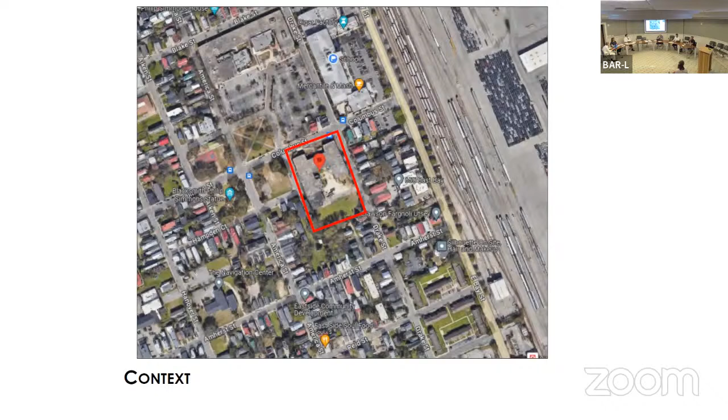63 Columbus Street is on the east side. It's not rated. It dates from 1957 in the Old City District. Applicant is requesting a review of a mock-up panel for a support building for the early college high school. Just by way of orientation, this is where said property is located.

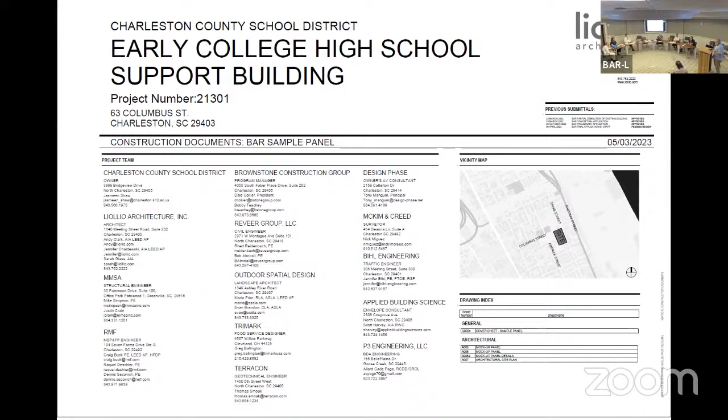Now we're ready for the applicant's presentation. Thank you, I'll be very brief. My name is Jay White, for the record, with Liollio Architecture. I'm here tonight with one of our associates, Sarah Glass, and Dion Jackson, who is with Contract Construction Company, who built the mock-up. We've worked very diligently as a team to get this mock-up to where it is. We're very happy with it, we hope you all are too. We're here to answer any questions you may have.

Are there any questions from city staff or the board at this time? I have one question, Mr. White. I went by and there's a small hole on one of the canopies, did y'all notice that? Yes, is that a drain hole? Okay, it drains the backside of the gym.

Other questions from the board or staff? To dispense with this, is there any member of the public wishing to speak on this item? Seeing none, city staff comments and recommendations.

Staff appreciate the quality of the mock-up panel. Staff note that while it is generally preferred to have window sealant and lintel color and brick walls match the generalized brick mortar blended color instead of the window color, the sealant in this case is very well executed and is acceptable. While a projected sunscreen assembly is shown on the mock-up, which incorporates a lintel, it is appropriate that this all be the same color. It is generally staff's position that where no sunscreen assembly exists, the lintel should match the generalized material color above it. There are no staff conditions for approval, and staff recommendation is for approval of the mock-up.

Would anyone on Mr. White's team care to respond to that, since Jay excused himself? Okay, very good. All right, so we move to discussion and vote, or maybe we don't need discussion.

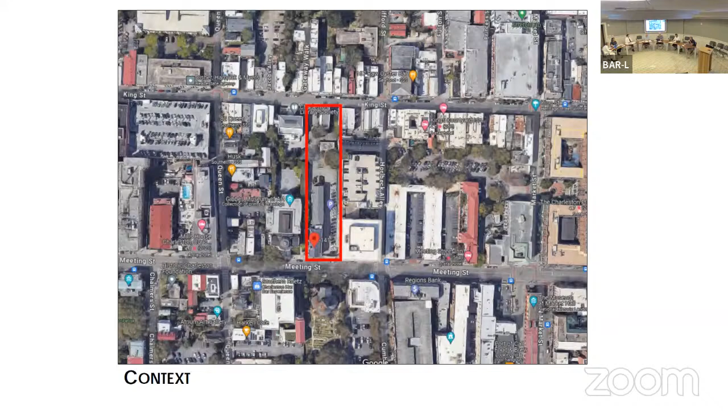We are ready for the applicant's presentation. Hello, my name is Ted Rish. I'm an architect with BMOC Hospitality Collection. And the slide is loading, but I think once it loads, you will see that we have some columns that are replication columns put in around 1960, we believe.

We don't know the exact date. They do not date back to the original E.B. White building that was built in 1876. We have reason to believe they were put in 1960 when SCE&G added the parking lot renovation to the site, and we feel they're not contributing to the public realm in any way.

We'd like to remove those. We did get demolition approval last fall for the 141 addition. We probably should have included these, but we didn't know at the time. We would need to get final approval on these particular columns so we can make way for the demolition equipment to get into the site for the addition and the Gibbes renovation they're doing right now back in the property. So we are seeking final approval for these elements of the site.

Since it's not loading for whatever reason, although it was on, what's on there is the color of the columns being kept versus the ones being removed. Could you just point on the screen? Sure, behind you.

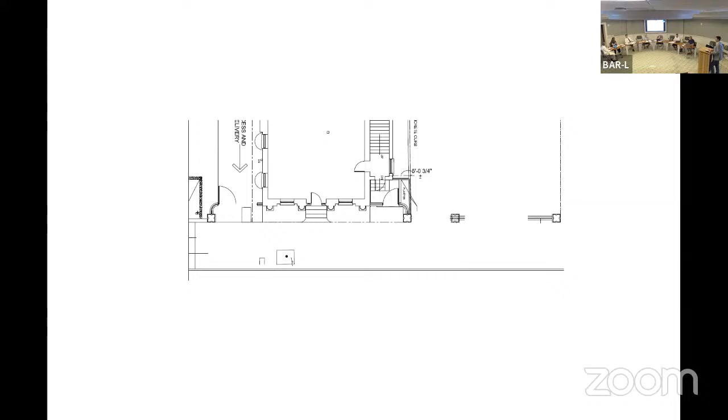City staff comments and recommendations? But do we need public comments? Oh, excuse me, yes. Is there any member of the public who wishes to speak on this agenda item? Seeing none—

It's very brief. Anna Catherine Alexander with the Preservation Society of Charleston. We appreciate the applicant reaching out. We're comfortable with the scope of demolition proposed to facilitate an improved pedestrian experience. And we just wanted to say for the record, we appreciate the applicant's willingness to reuse the existing ironwork on site and just encourage the board to incorporate that into your motion this evening. Thank you, Ms. Alexander. Any other member of the public wishing to be heard?

Seeing none. City staff comments and recommendations. For context and analysis, the two columns and low wall requested for removal date from the late 1950s and are not original to the EB White building as stated by applicant. The iron gates in front of the structure initially stood at the former building site on Church Street and were included by EB White when he designed the structure in the late 1870s.

Staff conditions for approval: all deconstruction work is to take into account adjacent or nearby structures and the protection and monitoring thereof. If any foundation work involving significant vibrations, such as driven piles, may be reasonably suspected to be a threat to historic or new adjacent or nearby structures, a program must be put in place addressing how these structures are to be protected and monitored. A copy of this protection and monitoring plan is to be transmitted to staff for review prior to work. This is because it's a category 1 building.

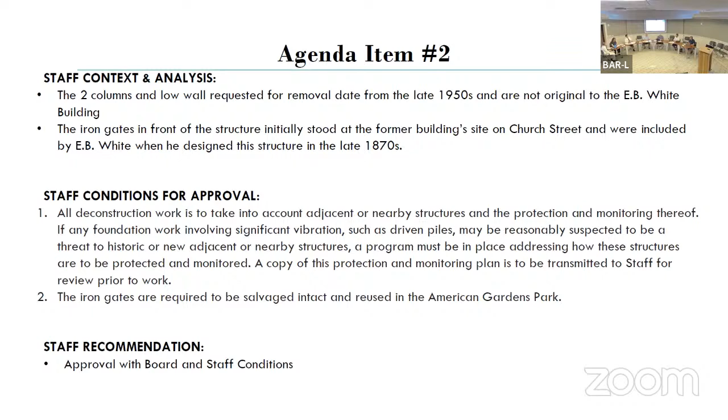Thank you to the applicant, which brings us right back to agenda item number 3. Item number 3 is also at the same property, 141 Meeting, or the larger site. The buildings include a Category 1 and Category 3 building. They are requesting conceptual approval of a new park plan, modifications to the existing 174 King Street building, which is the Category 3 building, and addition and modifications to the existing 141 Meeting Street building and Building Link, which is the Category 1 building.

No aerial necessary because we already just showed where the location of the property is. Very good. Mr. Rish, you have the floor again.

Again, for the record, my name is Ted Rish. I'm an architect with BMOC Hospitality Collection. I wanted to first ask if we could have an additional 10 minutes for our presentation. We'll be brief, but we may need that additional time. I wanted to let the board know that on behalf of our company, we're committed to working through all the details with all the stakeholders that may arise moving forward with the project.

I wanted to let you know that we broke down the submittal into three different components. You'll see the garden plan first, presented by Reese Roberts. Then you'll see the 174 King building presented by LS3P. And then the 141 building will be presented by Evans and Schmidt. So with that, I'll turn it over to David Kelly with Reese Roberts.

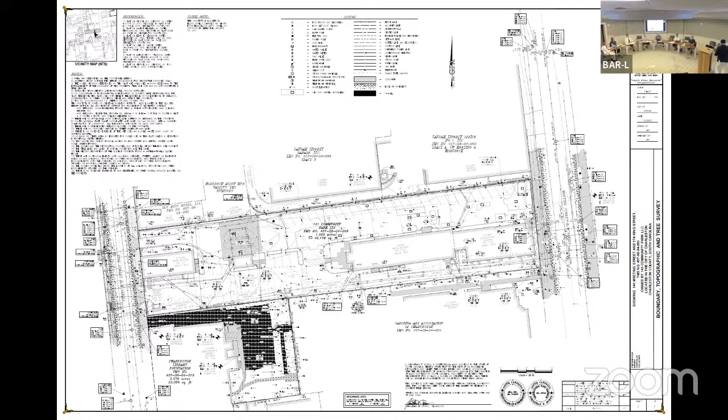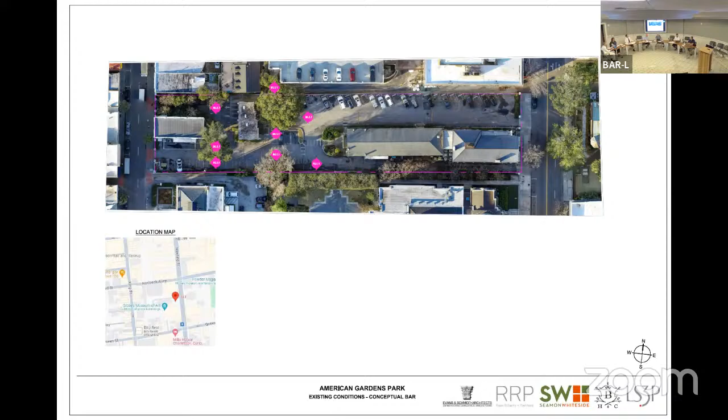If I could have the next slide. This basically shows you the building on King Street and the building on Meeting Street. This obviously gets demolished, and this is that bank building here. So the park essentially exists all between that, and in a sense the park holds those two buildings together—it's the landscape in between the two buildings. If I could have the next slide.

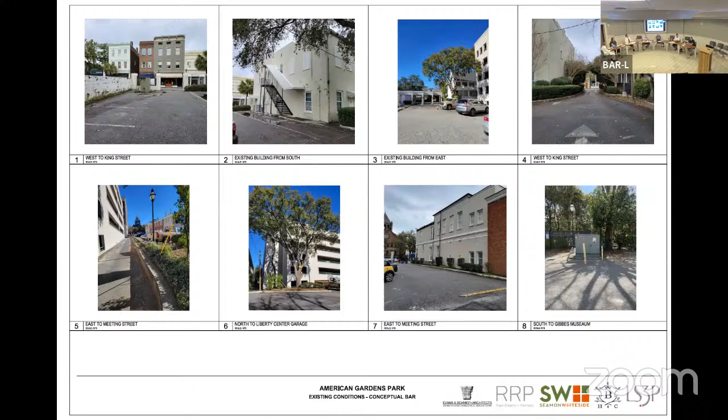These are more about the building, which we could keep going. Yeah, that's the building over here. And this shows the two buildings to be demolished.

These are images of different parks that we started to look at. This is Bryant Park in New York—we can click through these slides in a timely manner so we don't keep you forever. The idea of this beautiful lawn in the center of the city: we really wanted to think about this green space that was cool and lush, a place you wanted to go to when it was hot.

This is the Tuileries in France, looking at different ways you could connect the garden. We looked at the cemetery walk—that was a big one for us. When it gets to the library, it starts to break apart a little bit, so we thought of this garden as a way it could bring you across and connect up. I was particularly fascinated by the different ways you can slip through the city in the opposite direction to Meeting and King. We wanted to look at the park as a way to go between it, so if you had a meeting, you could use this that way.

Or you could slip into the park and meet your friend, have lunch, or get a sandwich and sit in the park. The introduction of water, which is in the plan, is very tranquil and beautiful in the city. It helps bring down the noise of traffic, a beautiful contemplative place. So we're really thinking about beautiful experiences for people in the city, and that's what makes great urban parks at any scale. It doesn't have to be Bryant Park or Central Park, they all work.

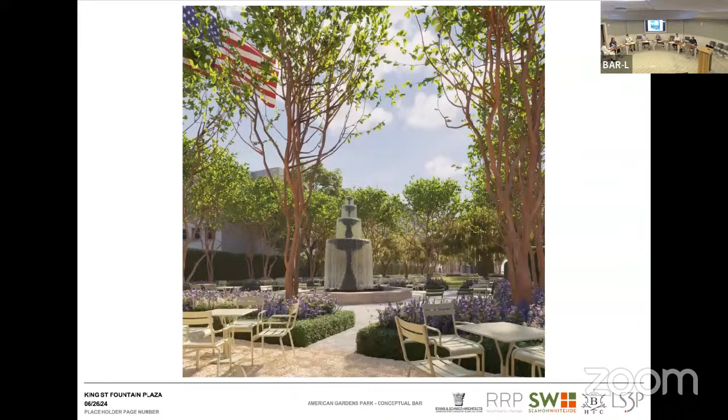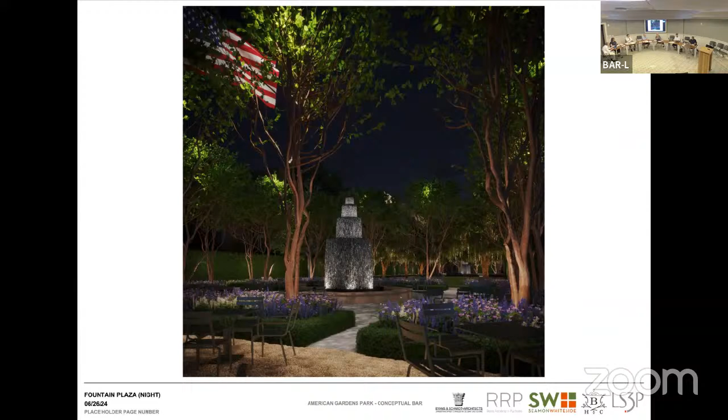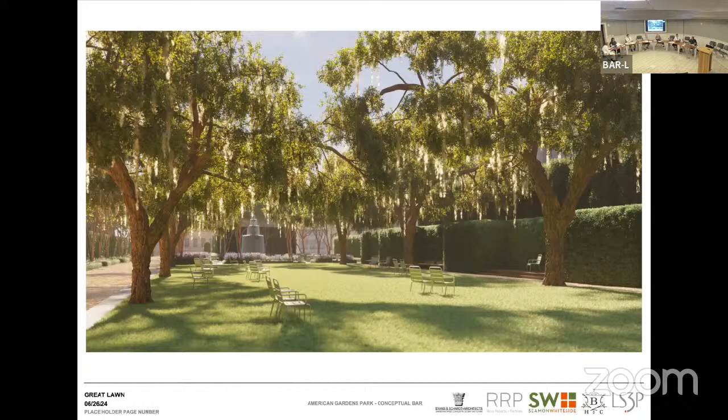These renderings basically take you through the various components. This shows the fountain plaza. The idea is also to bring the scale down, particularly of the two parking structures opposite the Gibbes, so that when you're in the park, the parking structures are more minimized, looking at the Great Lawn. The wonderful thing is these renderings actually depict the plantings at the scale they'll go in - this isn't something we'll be waiting 20 years for.

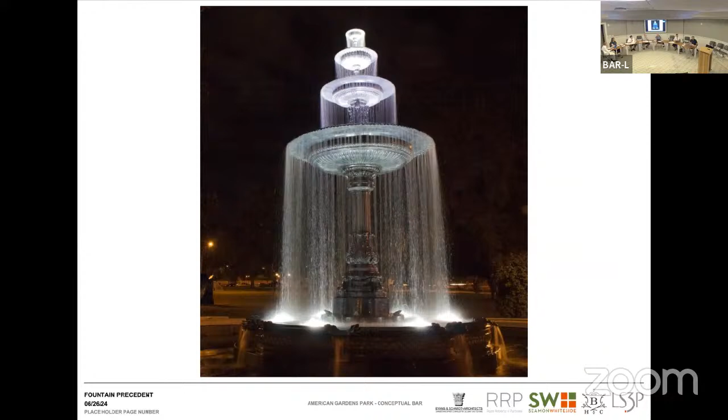So the fountain, looking back at the Gibbes building, the Fountain Plaza - looking at precedents for fountains, the idea of having something elegant but classical. We thought a lot about lighting at nighttime so the park feels very inviting at night, keeping it residential in feeling, but obviously you want to make it safe so if someone's there at night, they don't feel unsafe.

Bringing us to the gates, we started looking at gate designs. Myself and several team members went around Charleston, particularly in the area, looking at gate designs in that vicinity, up the road, around the corner - what was the context, what did the gates look like in that area, what they might look historically, the idea of columns, gate designs, things like that. The idea of columns with beautiful limestone caps, perhaps a beautiful crest for the American Gardens.

There are two inlaid pieces at the bottom, which would be painted brick, and then beautiful ironwork with a filigreed crisscross pattern at the bottom, which also mirrors itself in the gates that open. This is the King Street side, and the gates are all the same at the entry points, with one entry point on Meeting Street, one on King Street, and one on the opposite side of King Street. So they all play with each other.

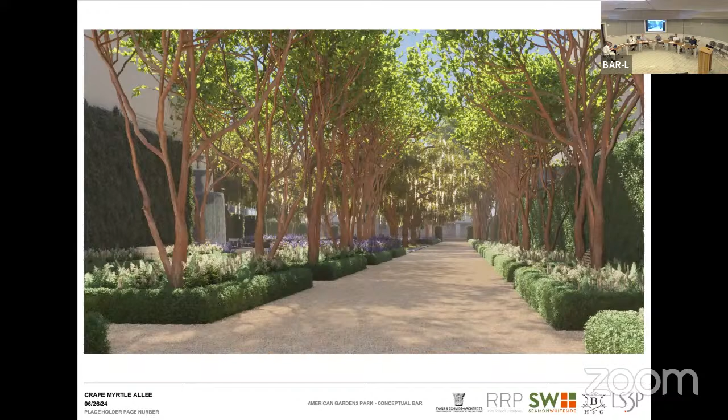So in that view, that would be a cobble? Please take the renderings with a grain of salt, because they've happened over a period of time and we've been updating things and working with materials. So essentially what we now have is this cobble in most locations because of ADA requirements.

We've been working on drainage and ADA compliance. The gravel didn't work with the drainage but it worked with the ADA, so we've been working to find something that works with both ADA and permeability. Whitner from Seamon Whiteside can speak to this more, she's been working like mad on this. Essentially it's beautiful tumbled pavers with gravel inlays on the alley.

Thank you. Members? That's the hedge, right, that you can see? Yeah, I see it. It runs basically around the entire park.

Good, very good. Other questions or commentary from the board at this time on this phase? Sounds like you've decided on crepe myrtles for the landscape architecture. Yes. You might love their crepe myrtles, don't they? I think that's at the entrance of Charleston Place as well.

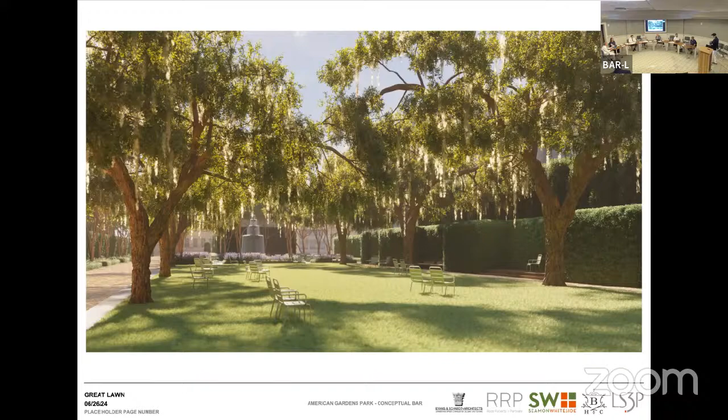My name is David Burt, I'm with LS3P, 205.5 King Street. We're now going to talk about 174 King.

As BD alluded to, this is a category 3 building. It's lived many lives. As best we can tell, this building was constructed around 1850, and ironically its original use was called Mount Vernon, used as a little cafe, a little ice cream shop, which is ironic because we're trying to put it back into use as a similar function. Back then it was named after Mount Vernon as a credit to George Washington, and we're going to be celebrating this as a park on the 250th anniversary of our country from 1776, so it all seems to be making full circle.

It's lived numerous lives. We know there was a fire around 1863, and this building did get burned, but we don't think it was burned completely down. We think just the inside was burned, a lot of the bones, and it was reconstructed just as it was. In its last life, we know it was an undergarments facility, they were building them upstairs. I'm not going to say what kind of sweatshop type thing they were doing, but whatever, that's what it was.

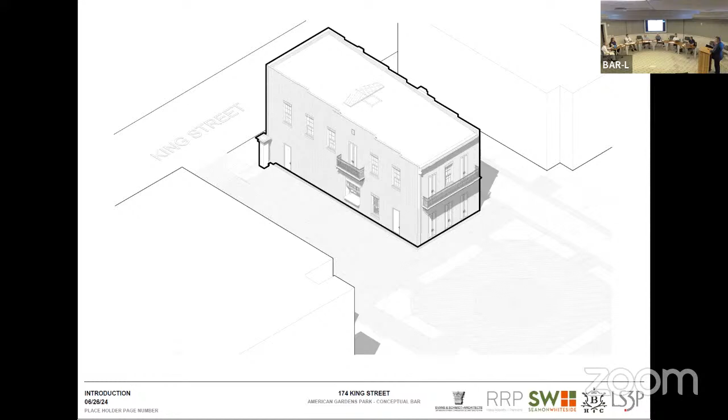So now, today's use, it's going to supplement the park. It's intended—you can go to the next one or I'll go. So there it is up on King Street.

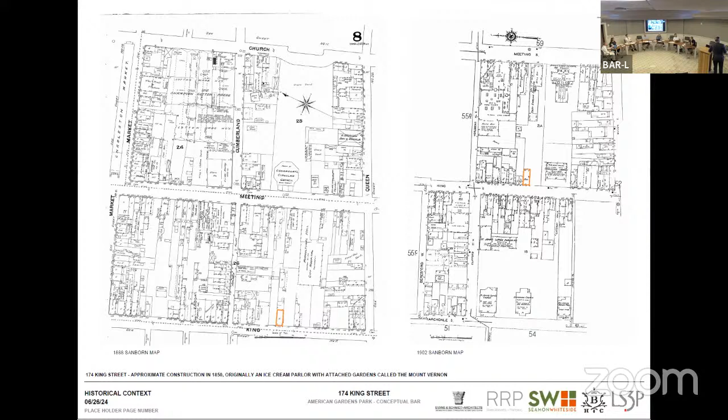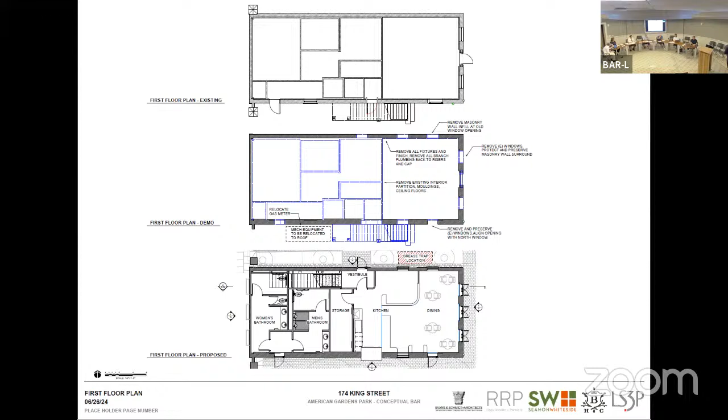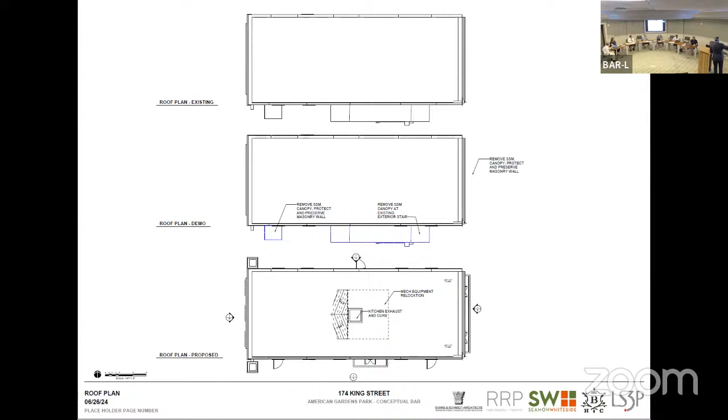Second floor, again existing, demo, proposed. You come up to the second floor, we have the park offices up here, and this conference center, bridal suite, whatever it's being used for, again has those views out to the park. We did incorporate a couple of balconies strategically, one covering those French doors below, and here this is actually protecting the transaction window for the cafe itself. And then we have some public restrooms up there. The roof, we're backing the equipment up as far as we can. This is just a section through it.

Again, the proposed elevation—existing, demo, proposed. We did walk around a lot of the buildings in this area on the back side. They do have these balconies. I wish I'd put that in this presentation, but it's very common to have these French Juliet-looking balconies literally across the street on King Street. The building—if you're at the front of this building, look across the back side—has those balconies.

Again, now on this north side, I do know for preservation purposes, if we could reduce the number of openings, that is a concern. We were told that it was a concern and even brought it up with Historic Charleston, the Preservation Society. It's possible that we could lose some of these windows if we need to. So we wanted to show you the design that would achieve the best outcome for our purposes, but if there is some concern about the number of openings, we can revisit those with you.

This is the south elevation. I would say the elevation that's going to become the most active of all of the elevations. This is where the transactions would be occurring—your bathroom access, your cafe access, transaction window, and the stairs going away. And we're not doing anything to the King Street elevation, leaving it as it is.

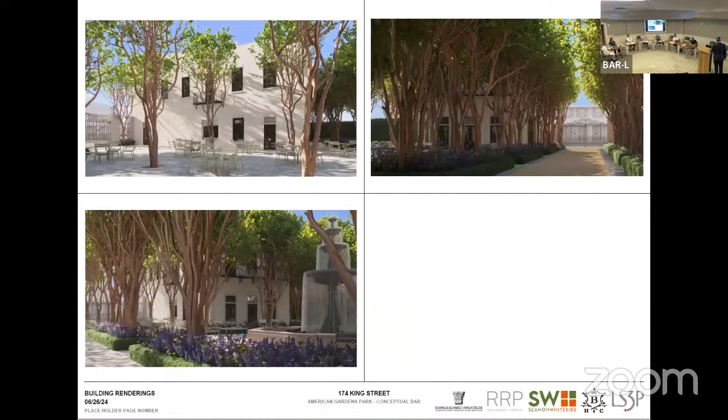These are a couple of the renderings that Reese Roberts basically just pulled out of theirs. They're not exactly depicting what we drew, but they're close enough for the purposes of today. Next round, they'll be a little more accurate. I think that's it. Yeah, that's it for me.

Very good, thank you. You all want to talk? Questions—yeah, questions from the board on this phase at this time. I do have questions. Good.

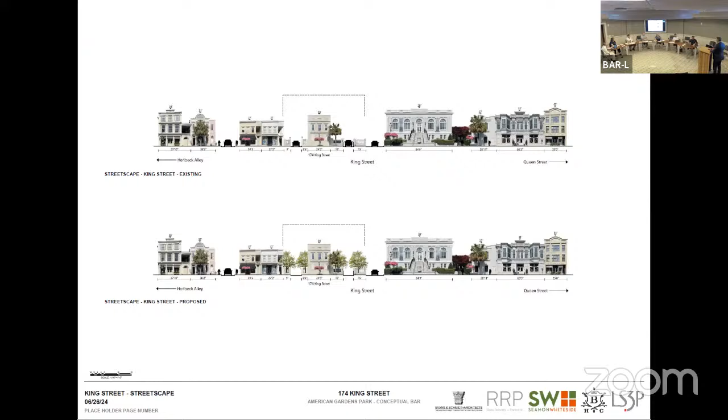Can you talk about the windows that are there now? I think they're all aluminum clad. And they don't really fit—are they staying? So the windows that are there now, I believe Dominion put them in there in 2016. They are pretty new.

I think they had board approval. There is a BAR plaque in there. Well, anyway, are they staying as is?

Those are insulated windows. Right now we're thinking we'll keep them, paint them, and match them for anything new we do. So the proposal would be some type of aluminum-clad wood for the windows.

For the doors, all the doors we're doing are going to be the equivalent of a Hope's door. We're trying to do the thin black, which if we paint the windows that are there now, it'll look similar if we use the same. So that's the intention.

On the south elevation, the one being drawn - those two doors on the ground floor would be some type of aluminum, full glass. It's intended to be full glass. We're debating whether we create a datum line and let the door be here and the glass be there, but it'll be a Hope's window or Hope's-looking window, a grand window.

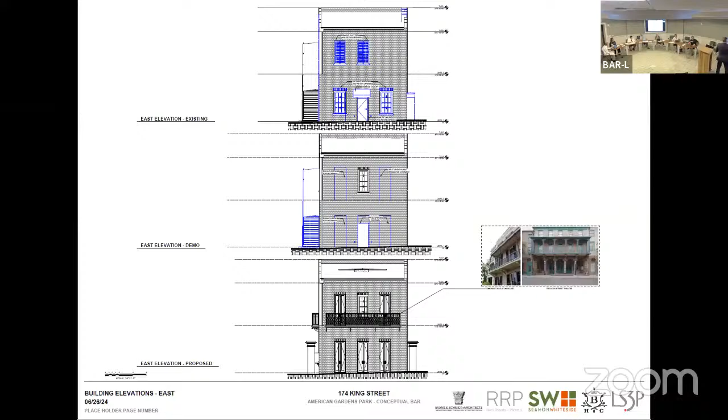And the French doors, and the window - is that some sort of slider? It is, like a slider. See it like a Wendy's or something? Yes - well, it's not quite like that.

I know it's not, but I know this is conceptual - I'm just trying to get a sense, because you can see that really clearly, and I want to make sure it feels like it would be in the building. We've got photographs of some really good transaction windows in parks like this that don't look like McDonald's - it's a Wendy's, a little nicer.

We were thinking about that too, that we don't want something that's just a roll-up, because - it's a hot day today, they were going to walk over here, I said you're crazy, we're going to drive. So we're going to have something you can open and close, but it feels good and is similar to the product we're using for the doors.

Okay, thank you, I wasn't clear on the windows and doors, so that helps a lot. Thank you, Mr. Metters?

When I looked at the building, on the west elevation, the bottom left window and the bottom right window - they're actually louvers right now.

Below the window on the left side of the north window and below the window on the right side of the south window, there are these interesting cracks that go in the stucco almost all the way down, almost as if that's been enclosed, or it used to be - I think this whole thing used to be storefront. I was looking at that and it was. Yeah, interesting. This building's lived so many lives. Digging into it has been fun, just to understand a little more about the history of it. But I do believe that ground floor - this tells me there was an awning here at some point.

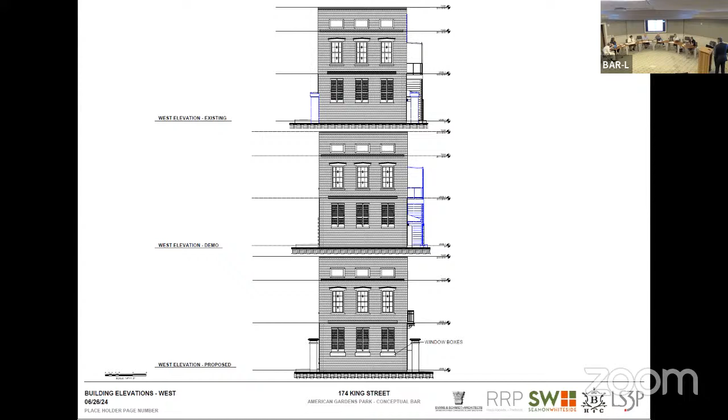Thank you. Other questions or commentary at this time on this phase? You're done.

Now that they've got you warmed up.

The Gibbes and the City of Charleston are going to have the opportunity to purchase the White Building from BMOC and incorporate it into their museum.

It sounded good, but the only problem is the only way a museum can expand is enclosed. If you have a separate building, the project will fail because people will not go from one building to another for museum exhibits. If you have a separate building, we have to have separate means of transportation for the art, which we put in place in 2015 to become an accredited museum. We actually had to have a loading door put on the south side of this building that semi trucks back up to, with sealed enclosures and everything.

We don't have the space or the ability to do that here.

From moment one, the struggle was: how do we do this? How do we connect these two properties that are both historic, that have two different architectural languages?

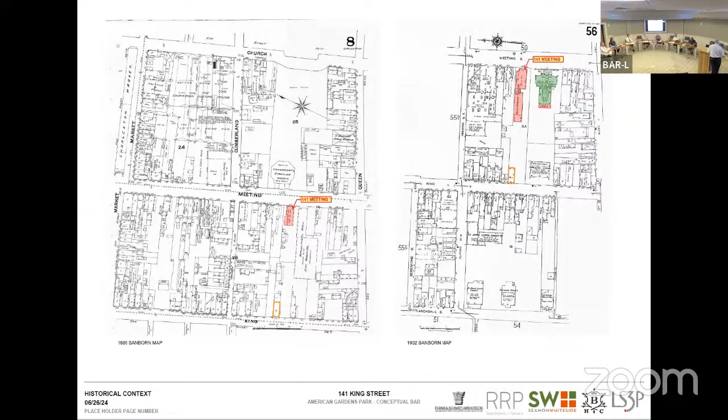Some of them incredibly bad, and some of them very nice. And the predominant success was always with—I'm destroying your clicker—was with a soft arch.

But one of the things that we did learn from this is that the distance between them could not be too great. And the distance we have between these two buildings actually is fairly large, as it's straddling both properties.

So the first premise I knew I had to do is try to reduce this, get it all on the E.B. White site and not on the Gibbes property. Get that span down so that it did not look like a bridge, it looked like a building connection.

That was Europe, and I met with Lawrence and BD, and BD said, well, that's all well and good, but find something in the United States, preferably on the East Coast, preferably between two historic buildings. And luckily, I had been to this site a few years ago in Chicago, and it hit most of the buttons that I needed to hit.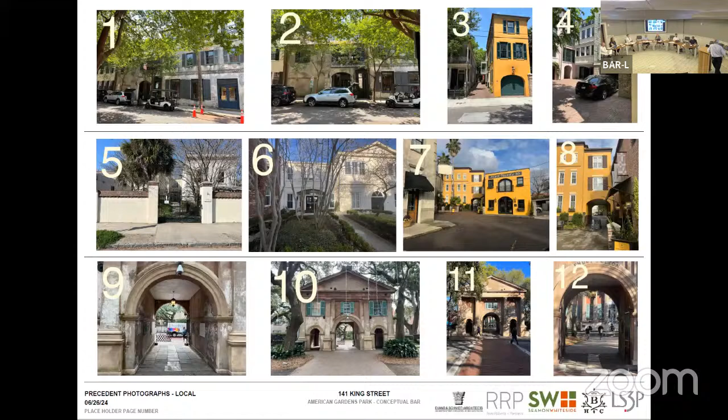Examples in Charleston—there are some bridged. These two buildings are separate, bridged right at the street. This is a project that y'all are familiar with, up in the neck a little bit more. This one I totally forgot that we had done, ironically, when we did this about 25 years ago.

This is connecting the McBee building with Lane Hall and Ashley Hall, set back from the street, and in this case, it's enclosed on the ground floor. But it's been very successful.

This was one that I didn't know had happened, and I keep meaning to look into it. I'm pretty sure that's historic. I know that one is, so I assume this is the link.

All this time, though, I always had the Porter's Lodge in mind, because I've always liked it. I just thought it was a neat thing. This is College of Charleston, the Porter's Lodge, with the two side gates and the centerpiece.

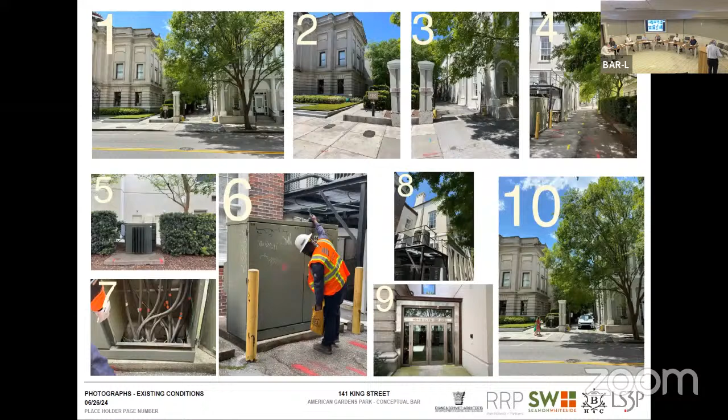So with that, we started tackling the problem. I wanted to keep the span only on this property. We had to deal with the issue of transformers, the link to the Gibbs, but beyond the Gibbs—so Gibbs ends here, then these are additions that were done in 1977, I believe.

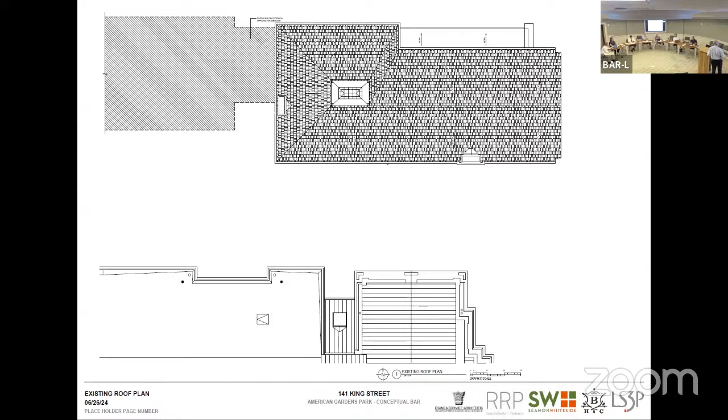Move forward. Take over, I'm losing control here. Lawrence, you take over from Judge. Clicking. Angela brought up a good point—after all these years, we still call it a clicker. Nobody's come up with a better name than a clicker. No wonder they don't work. So those were just examples. Well, you're one of the best now. I think it's because it finally caught up with all the clicking. We won't hold it again. Let it stop, we're done. Going back—or forward, looks like. Am I doing it or are you doing it? I don't want to. You're not touching anything. No, I think it just responded to all the previous clicking. Gotcha, finally. That goes to the machine.

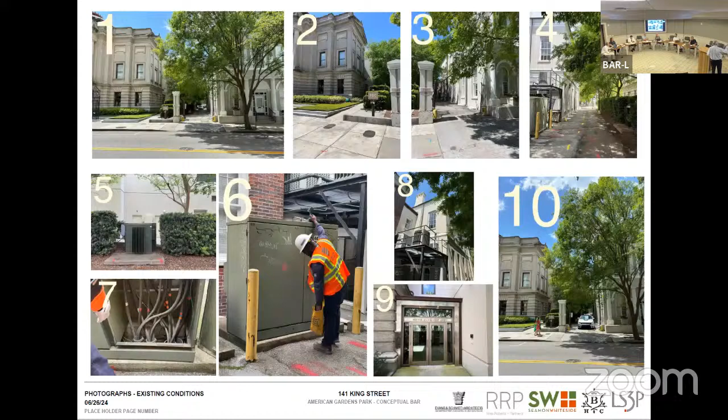Okay, so, okay, all right. Hopefully it'll stop.

Just some examples of the simple but elegant detailing on the EB White building. We wanted to bring some of this in, not slavishly, but there's not a whole lot going on. The attractive part of the building is actually the front, and the sides are fairly plain to that.

Keep this in mind, the EB White building ends here. Even though there's no demarcation, this was an addition that's going to be torn down. It's amazing we're a little concerned when this demolition happens—they toothed that together somehow. There's not the slightest crack in it for a building that's not as massively built as this, and yet there's no separation in the stucco whatsoever.

Everything from there back will be demolished. So this is the existing condition. This is the property line. There's a transformer here for the Gibbs, and there's a transformer here for the SCE&G. What you see shaded is what's coming off the building. This is where the original Gibbs ends right here, and this is the 1977 addition.

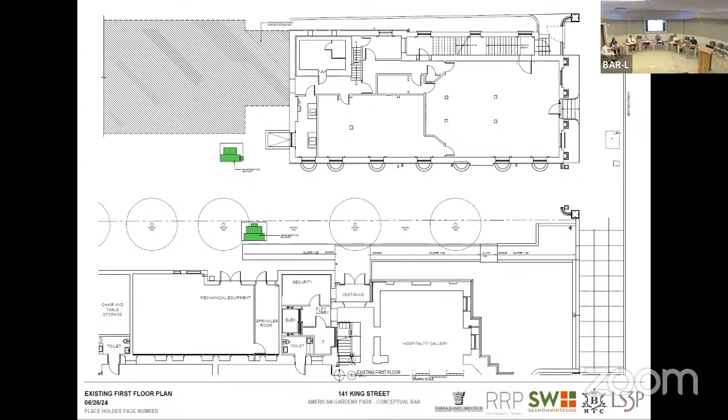So our proposal, 106 feet back, is that we will build a two-story building on the back within pretty much the exact same footprint of what's being demolished, with the exception that where we historically treated the setback flush, we're pulling it back 20 inches and putting an addition on it.

We needed property from BMOC to allow us to do this for two reasons. One, we knew we were not going to be connecting into the side of a Category 1 building. Two, this building, as beautiful as it is, is actually perfect for the Gibbs, because as far as we can tell it was originally one big room, another big room, and at one time a staircase on that corner—that's it. There are no bathrooms in it, no elevators, no stairwells, nothing we need. But because of this link, we get the bathrooms we need, we'll get the elevator, and between their stair and our stairs we have three of them. We will not need to replicate the second stair for this building.

To do this, however, that's sitting right over top of the transformer. We thought we had this figured out, only to find out that SCE&G said no, you're not doing that. So we are going to have them moved out from underneath there and bring both out—one's sitting right about here now, one's sitting right there—we have to move them. There's a couple of sites we're talking about with Dominion, but it hasn't been consummated yet.

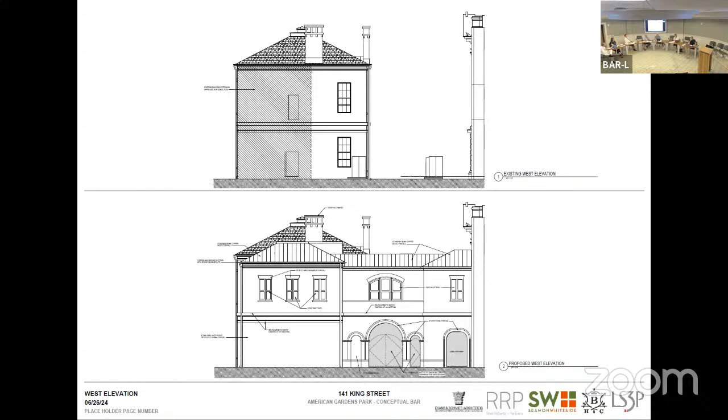Gives you a better view of it. This one is a walkthrough, this one is not. These would be closed, the park didn't want us looking down into the park. We obviously, if we're hanging art in that corridor, can't have too many windows. We can have ones on the other side.

This restudy, that treatment will come out of our discussions with the city and the two groups and yourself. I'm not committed to any of this, because what I've sort of done is create the false history of something that doesn't even exist yet. So in my mind, it may be better to leave some of this blank and figure out some of the way the street is.

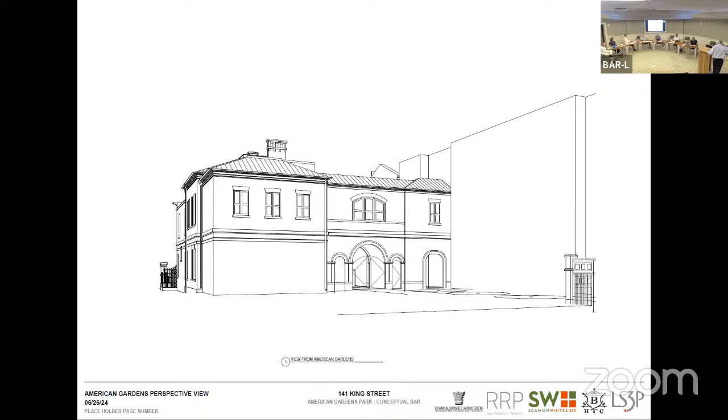The south side, there's a good chance we will bring this window back. It would have been taken out about the 60s or so when they made the front room up there, and that was their teller window that you go in. And so they took that one out. There is no fireplace there or there, but the chimney's still there, and all that'll stay.

This is recessed back in, which I can go back to the plan if you don't remember. And this is the extension of the building connection. There's a lot of depth in here. There's a 10-inch difference between the two properties. It'll be very subtle in that length. But we also need to get all the utilities through there between the two buildings, because this building can't support its own sprinkler system, its own communication systems, its own chill pipe connections, boiler pipe. So all that will happen here and here, which is the reason we have the attic space in there, to be able to get the connection between these two buildings.

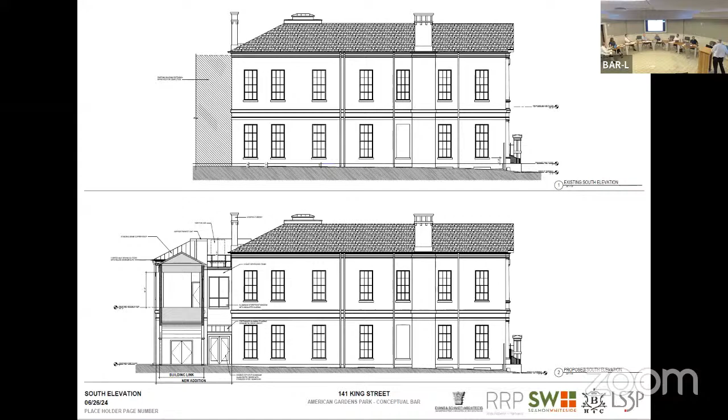Oh, that was the timer. It shut you off after a while. Okay, okay, just like practice for one night, you know. Well, it somehow flipped to somewhere else. Can you find it? One time, or I will.

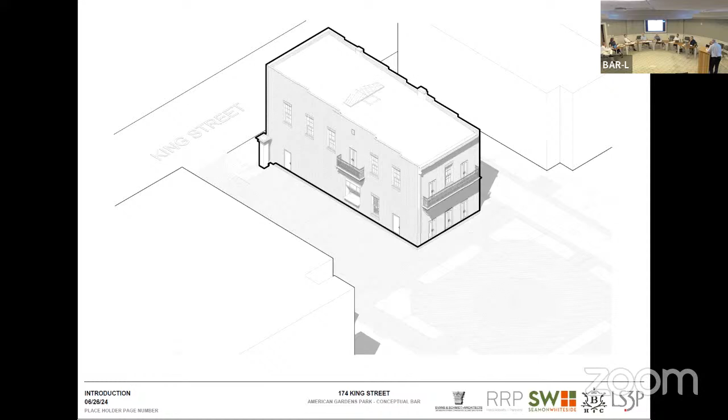Yeah, there it is. There you go. So that's, and again, you can, when you're walking by, you can see the other arch develop in there. As you put in the driveway, it'll do a good job. This is looking straight across, see through there. There's a very significant hedgerow that Ben Lenhart's been working on and grooming right here, podocarpus. We had them turned on, we turned them back off because landscape covers up architecture and you don't want to see it, but that will remain.

So again, you won't be reading this like this. And there's also the large elm trees here, two of them, I believe, still will remain. So they will not read as you see it here. But again, for our purposes, we turned it off, so that we're not showing any interior plans of the building yet. But like I said, the beauty of this is it's all cobbled up in the little office spaces, and we will be taking it back as near as we can tell.

This was not SCNG, this was the gas company. And it was some very wealthy fat men who sat around a huge table smoking cigars, patting themselves on the back. There was no working offices in here that day. It was just these big spaces, and that's beautiful because now the Gibbs will open that up. The moldings inside most of them are still intact. They're beautiful. It's going to be a very good use of a Category 1 building that will become public.

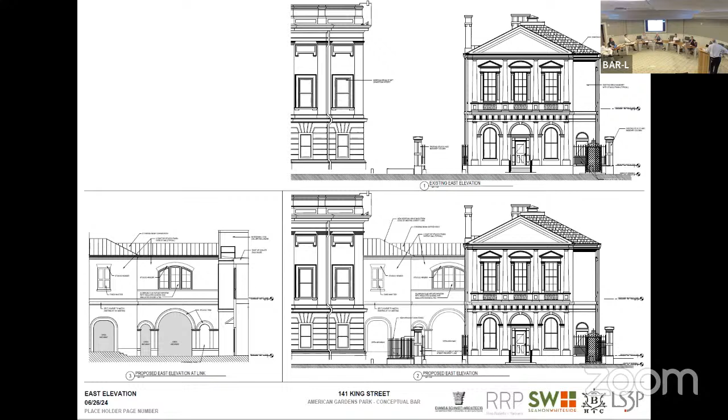And then this is more of a question, I know we'll talk about this as a board in a minute, but you set up the arch to be off center from between the two buildings, you stepped it. Is there a reason for that? Follow you, you went back and forth, you talked about Porter's Lodge, and it makes all perfect sense to me. But it strikes me as, like, why didn't you just center it between the two buildings?

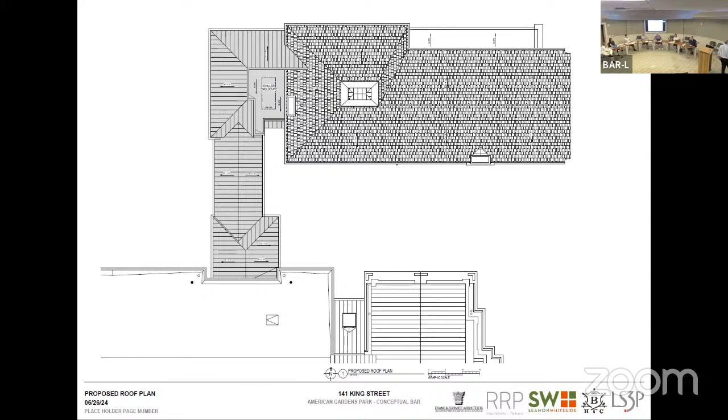Well, because driveways, I don't know the exact width on it, actually 12 feet or so, it's not very wide, so we couldn't get- so this is the next plan. And it's okay, I'm just asking because, it doesn't, like, when I look at the elevations, I'm like, why wouldn't that be in the middle? I mean, you couldn't develop all that within that space.

Can you find the elevation where you have the... Well, I'm looking for the ground, we don't have to get to the next sheet before this one, there. There you go. Why wouldn't, see where the arrow is, why wouldn't that arrow is kind of in the middle, why wouldn't the arch be? Why didn't you just slide that page south? Follow? Yes, I do. Because you've got room, I mean, why wouldn't you just?

Because this is the property line between the two of them, and this will not be able to support anything. This is where all the lines are running under. So this will be the structure that span will be bearing from there to there.

What we try to do is create enough room to develop the feel that we wanted. But it's not something, and again, with this one not being open anyway, it's not something you need to appreciate all that, but when you go down there, it has a soft feeling.

I just want to get it. Grab that one piece and slide it down. But you can't because of where the drive, where the gates are, that wall. It's fixed, it can't move.

But this is what I was trying to say, deliberately not running that straight through on that. This was to develop it. I got it. Okay, yeah, okay. All right, thanks. Sorry, I'm just trying to understand it.

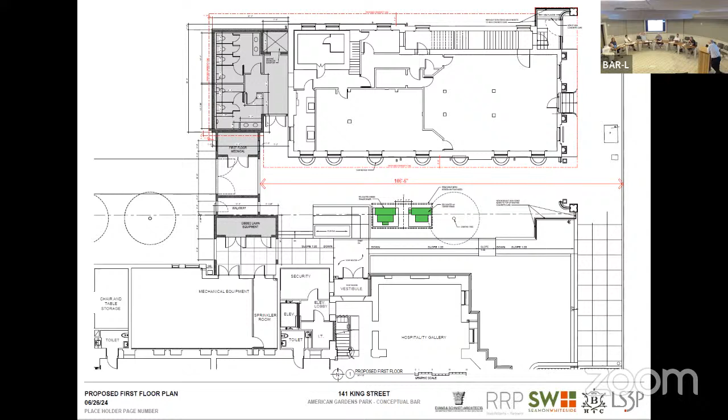So I want to go back to the picture that shows, can't find the page number on here. Oh, this placeholder. So go to the composite site plan.

Talking about their presentation. Yeah. Okay, because I'm just...

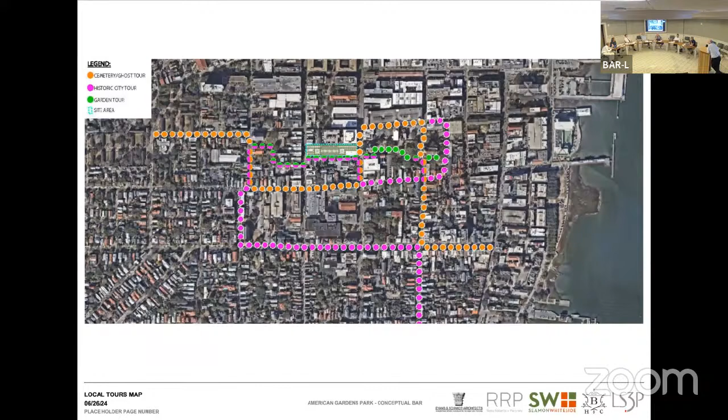Well, you know, crapes are different from regular trees. They don't, they're gonna- yeah, they can grow anywhere, right, they can grow more vertical and not have a big canopy over it.

And again, it's just looking at the graphic, but whoever wants to answer this, you look at the trees adjacent or on the north side of the EB White building, and especially the north side of it. And again, it's just presentation, but when you're looking at it, you're going like, how does that work?

And that makes me think about the integration of these three plans, and either good communication or lack of communication between the groups about how all those details are being worked out, which brings me ultimately to the 174 question about the pre-design conference meeting, whether or not that would help work out all of these details. So that's where I was going with that.

Thank you. Further questions or board comment at this time? Seeing none, thank you to the applicant. Is there any members of the public who wish to be heard on this agenda?

Anna Catherine Alexander with the Preservation Society of Charleston.

The Preservation Society appreciated the chance to discuss this proposal with the project team, and we're supportive of efforts to create an urban park and central connection between King and Meeting Streets, enhancing the public realm. This will be a highly visible component of our public landscape, and it is in the community's interest to get this right.

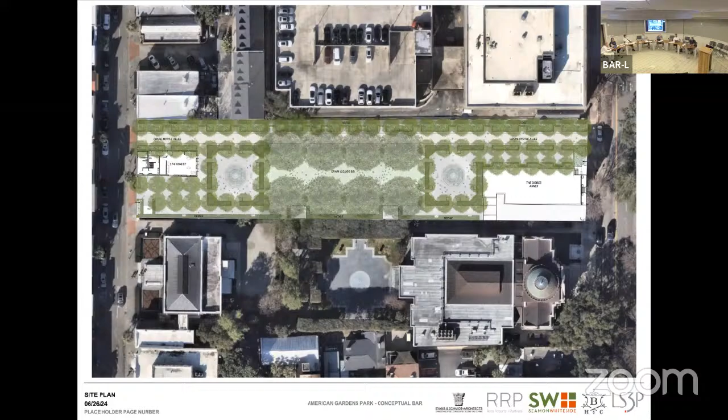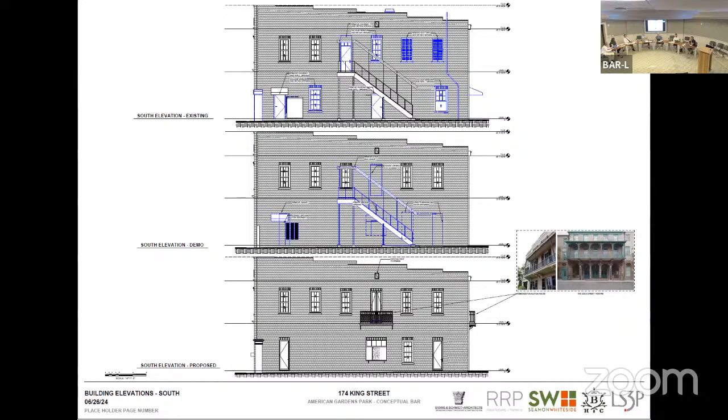Is there any more public comment? I was confused as to whether Ms. Mack and Mr. Lenhart were going to say something in this portion of the meeting. She'd like to respond. No, that's not the appropriate time for response to public comment by the applicant.

City staff comments and recommendations. City staff comments are going to be made in the groups of the three items before we get to the recommendations.

With the American Gardens Park, staff support the design of the American Gardens Park. It provides a new landscape link between King and Meeting via the Crape Myrtle Allee. The Allee, King Street Fountain Plaza, Gibbs Fountain Plaza, and Great Lawn are well-proportioned spaces that will be an asset to the city. Staff support the design of the proposed gates and fences associated with the park.

Next is 141 Meeting Street, or the EB White building. Staff support the height, scale, and mass of the new addition and bridge link between the historic building and the Gibbs main building. The form of the proposed addition is deferential to the historic EB White building, as it attaches to the historic structure only where the current addition, previously approved for demolition, already exists.

The rear corners of the historic structure are revealed to allow the original mass to be understood. The new addition is also subordinate to the ridgeline and roof mass of the historic building. And because it is placed at the rear of the structure, the proposed addition does not dominate the EB White building nor the Gibbs Museum of Art, which it adjoins.

On the north elevation, staff support the two new wood windows that match the scale and appearance of the existing. On the south elevation, staff support the second-story aluminum window and ground floor doors of the new addition and building link that help differentiate the new addition from the historic EB White structure.

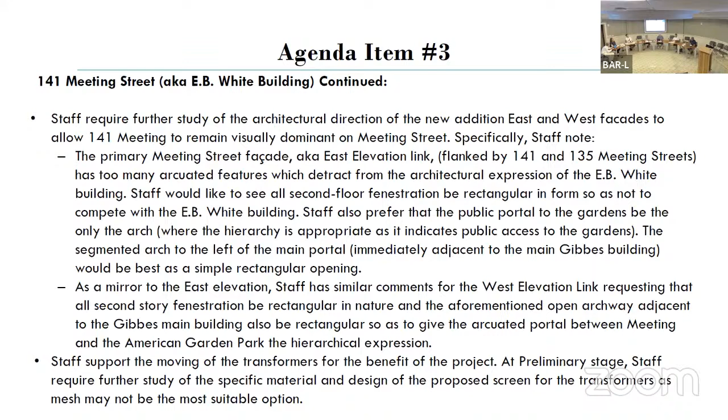Staff support the moving of the transformers for the benefit of the project. At preliminary stage, staff require further study of the specific material and design of the proposed screen for the transformers, as mesh may not be the most suitable option.